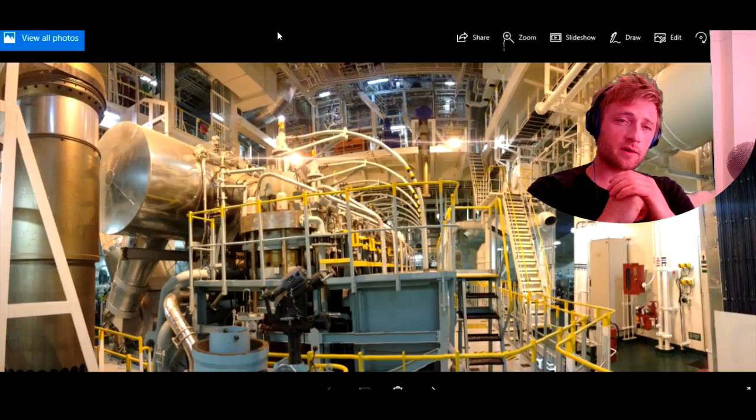As I have seen, this is a Greek company. And as I have seen here, this is something like Sulzer engine, okay, or Wärtsilä, something like that, RTA maybe. But I have never experienced with that. It's not so big deal though, everything is mostly the same. Some design is different, and tightening pressures, but everything is the same, two-stroke engine.

Very small difference, okay. If you take the manual and read everything, it's easy, okay guys. I have seen some difference in the exhaust valve here. There are only two hydraulic nuts and studs which tighten, smaller pipes here. Yeah, they have some difference.

Very clean engine room, very good, very new ship. Only 2 years old, it's like everything is new.

And here it's in the purifier room. We have seen here auto backwash filters, Boll & Kirch, I have seen that one. IMO pumps, same as my previous type. Everything is the same, only this pump is horizontal type, but it's same as the previous. It's a gear type. Westfalia purifiers.

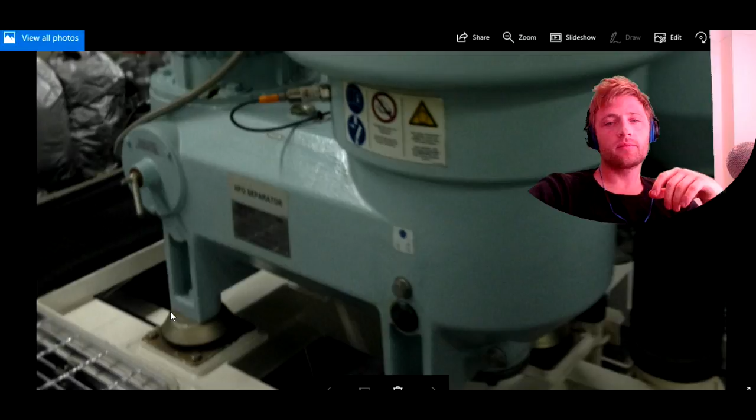I don't know if it's good, Radoslav. I have experienced twice with these purifiers. For 6 months I believe they work very good if the maintenance is good. Here we can see the brake of the purifier. We can see also the legs here, which are in rubber to avoid vibration.

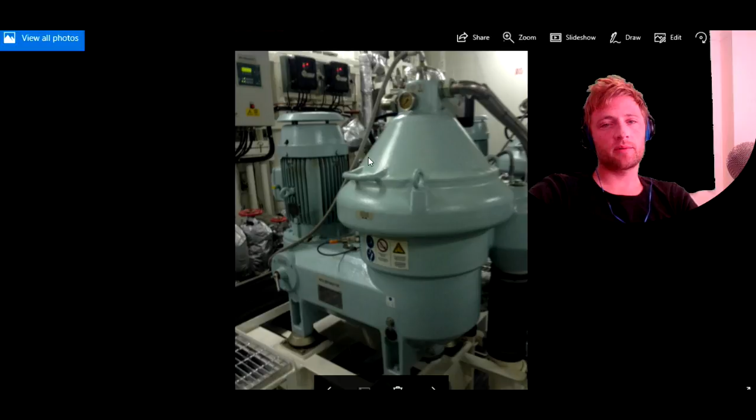Okay, purifier, it's a purifier. This is for the water supply pipe. Almost the same, nothing's changed since I have seen this purifier in 2006. Everything is the same, okay, this is a fuel feed pump, main engine, IMO type.

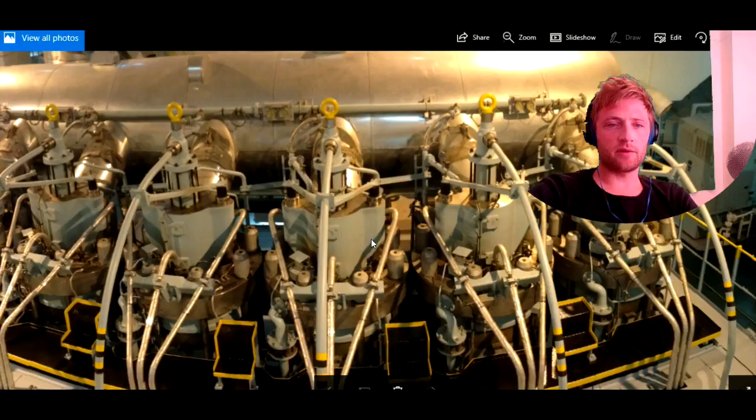And this is the engine from the top. Okay, we have 3 injectors on each cylinder cover. This is 2 nuts as I have seen, but okay, the studs are very big. Everything, the exhaust valve, it's opening with oil, same as B&W. I like the space here, it's very easy to work and you have plenty of space.

Space is very important to work in the engine room. It's better to have one stand here or one platform. I don't know, this is VLCC, seems it's VLCC, Radoslav, yes?

Almost the same, exactly the same. We had our generators here, because I see from the design. Okay, the ladder maybe it's changed a little bit. 2 turbochargers.

Nice, very clean. I don't know, maybe these rails, everything, the paint was made by the crew. And here it's the service and settling tank of the incinerator, okay.

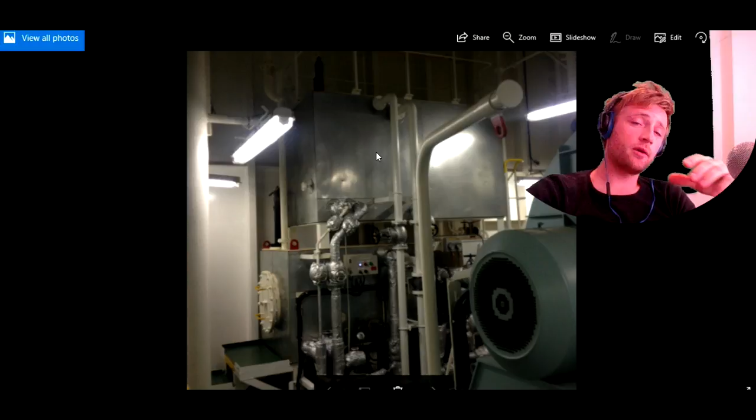At the evening time, okay, we start from the evening, the oiler and 3rd engineer fill this tank for the night. At night time this evaporation takes place, and whatever water is evaporated, okay, the oil remains here at the middle, or maybe up, it depends how much water is concentrated in the sludges. In the morning they drop the settling to service, and the temperature goes to about 80 degrees, because some incinerators have a lock, they will not start if the temperature doesn't reach 80 degrees, because if the temperature is lower, maybe you will damage the stator of the pump of the incinerator.

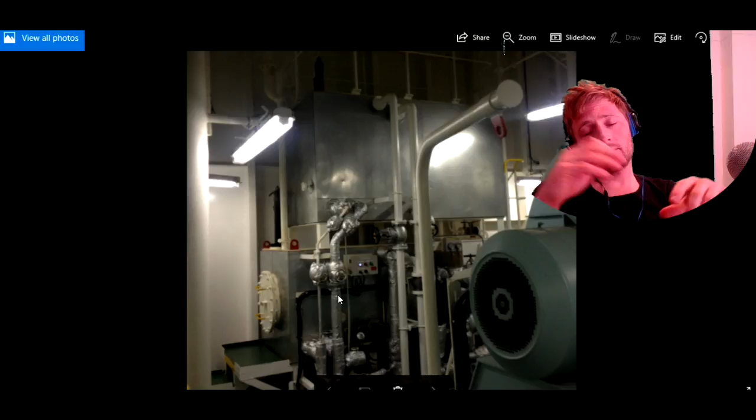Okay, and then they start, the incinerator works all day until it burns the service tank. It depends if the quality of sludge is okay, and directly they fill, same day they fill up the settling tank to stay all day and all night and to be ready for tomorrow. Okay, this is how it works.

And from here you can control the pump, the sludge pump, which sends here. This is the filling valve here, and here this is a sight glass for overflow, you can see if your service tank or settling tank overflows. From here is the heating inlet and outlet, this is the inlet of two tanks. There are some temperature controllers here, temperature sensors, pressure gauges of the circulating pump.

This is the pressure gauges of the circulating pump, located somewhere between the pipes. And here these are sounding pipes for the service tank, and a sounding pipe at the top for the settling tank. Inspection doors.

Okay, let's continue. This is the top, these are the service and settling tanks here. This is the blowers, okay, this is the boiler supply air draft fan, supplies the air for the boilers. This is IG fans 1 and 2, and this here it's the scrubber tower. It's exactly the same, maybe this is VLCC, a big ship.

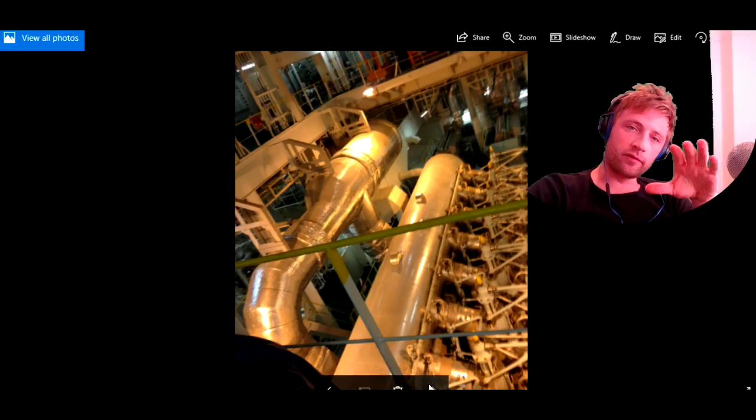Top view of the engine. Okay, this is compressors. I really don't like this compressor because it's not water cooled, it's air cooled. It's a small compressor, but I believe this one is water cooled also.

Maybe also this one, but very small amount of cooling, because on other ships, in a previous ship, we had very strong 4-stage compressors that filled the air very quickly, everything. This one, these are really small compressors. I have faced this type of compressor before.

Okay, this one is an updated version. I have one experience on a ship where small pipes were broken by the vibration.

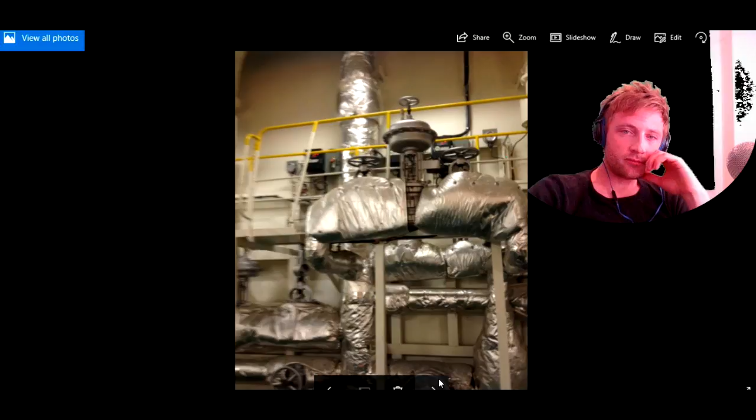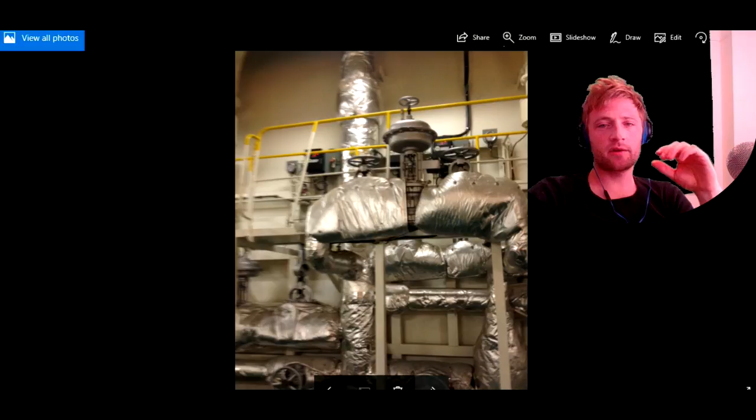Next, these are some steam dumping valves here, some controls. Maybe this is for the deck heating, most of them, okay, for 6 kilos, 10 kilos dumping, steam dumping system.

And here it's the hydrophore and drinking tank. From here the water supplies to the engine room. One of them is fresh water, one is drinking water, and the other supplies to the galley from the freshwater tanks. The pumps fill the level here.

Okay, and when we open somewhere the water, it supplies from here by the pressure through the line. The pressure is kept every time in the line so the water can travel. This is the suction point here, and the discharge is this one.

I have made videos for this one. I believe I have time lapse where we check this hydrophore, we open it inside. Check them please. We also test pressure gauges and pressure switches. Very simple system, nothing here.

And here it's the mineralizer, which gives minerals to the water. This also must be inspected, and I have made a separate video for that one.

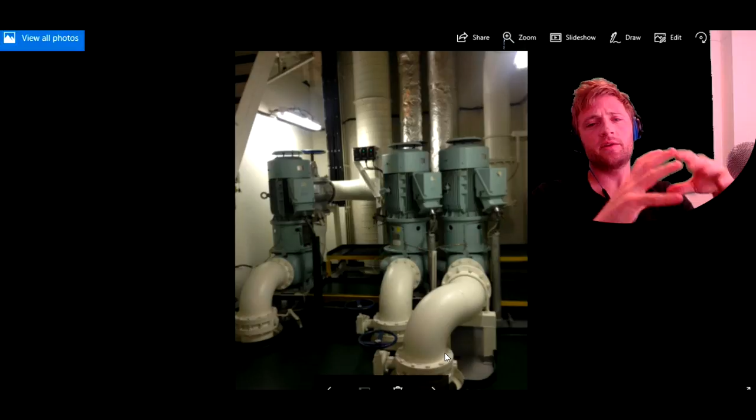Okay, this is some kind of pump. I believe these are low temperature cooling pumps, three of them. And next we have the evaporator.

In the last ship I had the same type of evaporator. Okay, this is Sasakura, same, exactly the same.

And here it's the atmospheric condenser, and at the back maybe it's the cascade tank. And here we have a 3-way valve, which adjusts the temperature in the high temperature system and low temperature jacket system.

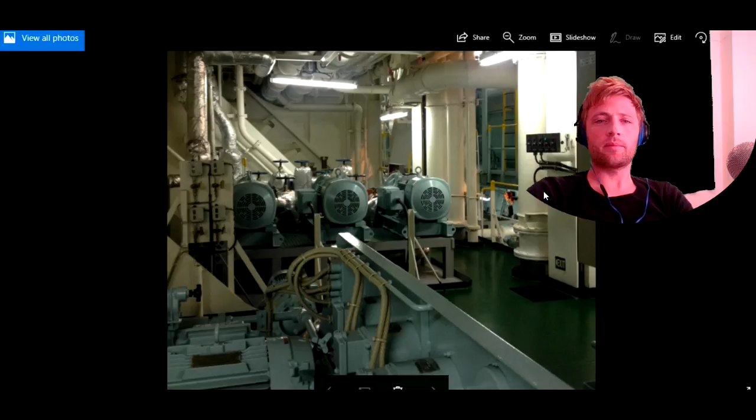It's connected to this set point box, Nakakita. And here I believe we are almost at the bottom somewhere. This is the feed pumps, 3 boiler feed pumps. You can work the system with one, each one, or you can also work with 2 pumps.

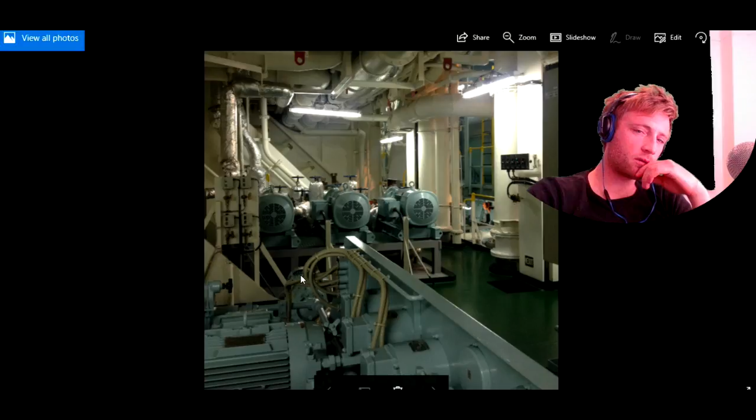And here also, first time I see this hydraulic unit, these pumps, located down in the engine room. Most of them are located in the upper deck or sunken deck, and they have a separate room. First time I see it located in the engine room.

This is the remote control valve system. The chief officer operates it from his cargo control room.

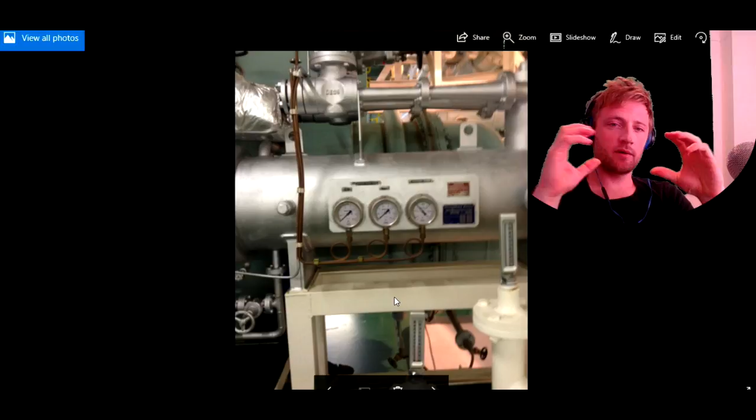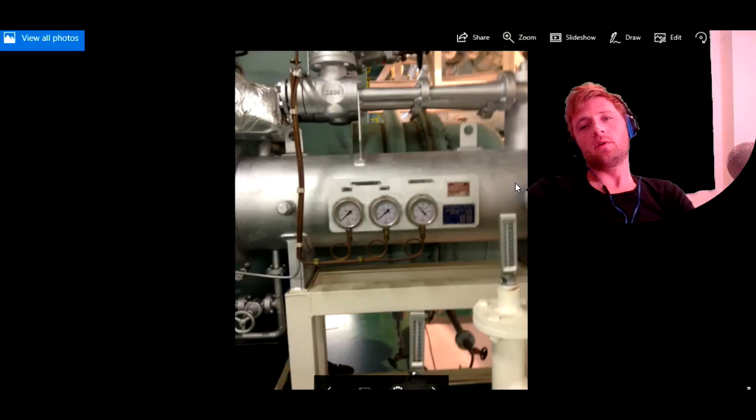And this is the ejector cooler. This is a cooler, and also at the top you can see the ejector, which produces the vacuum inside the condenser. The steam passes at the middle here, has high velocity, and produces a draft from here, dragging whatever air is inside and pulling it out, and this way the vacuum is obtained.

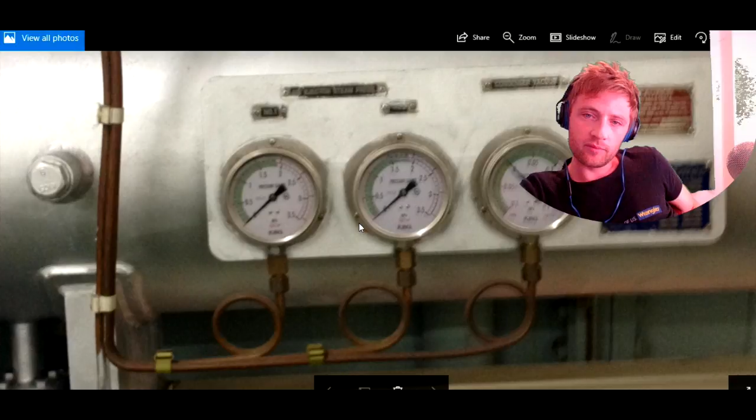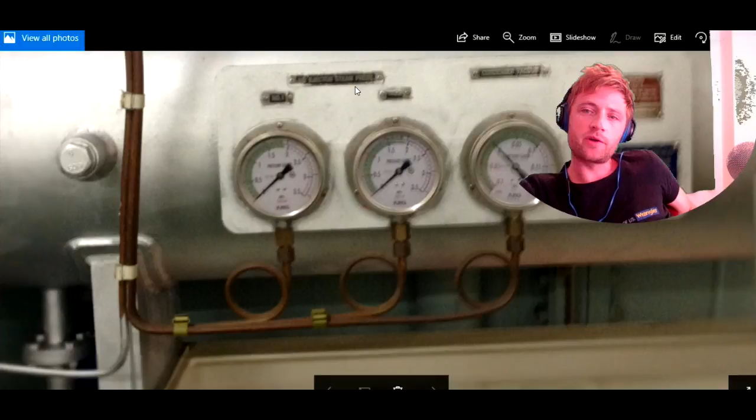Here you can see the vacuum. Where is the vacuum? Okay, here is the pressure, it's not working now, and the vacuum is here, condenser vacuum. This is the pressure of the injector, air injector steam pressure. Same type, everything. I see the ship is Korean built, exactly the same type.

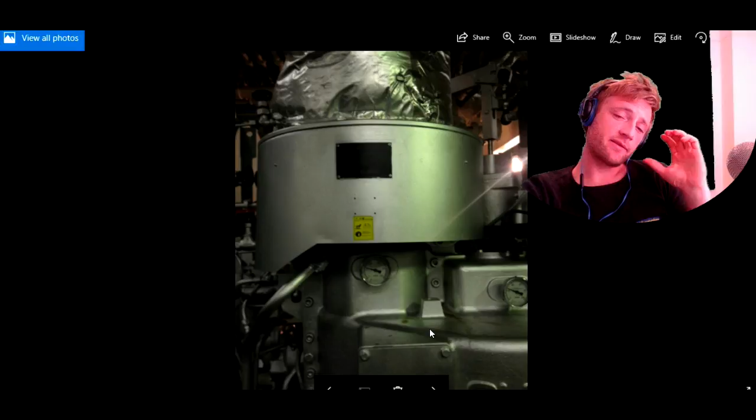And this is the turbine. Okay, this is Shinko. I recognize it. I'm very satisfied with Shinko. If you make proper maintenance, maybe you will never need to touch them. Only to replace some oils, some mechanical seals, as time passes, and some grease, some lubricating oil, and monitor them. It's a very nice system and durable.

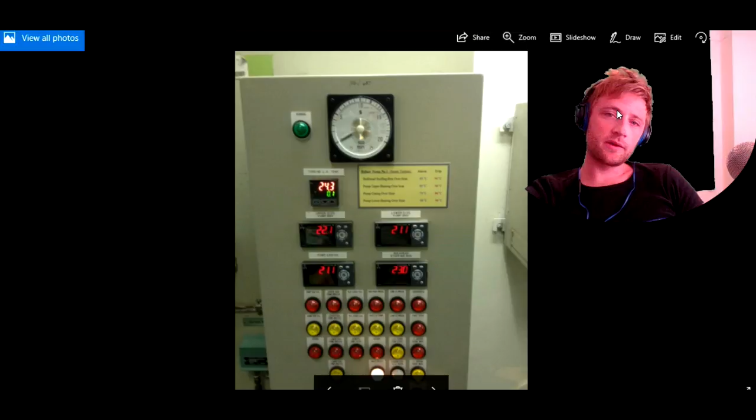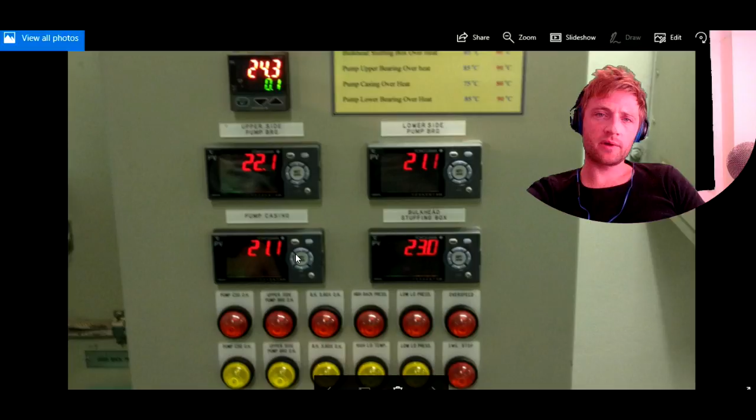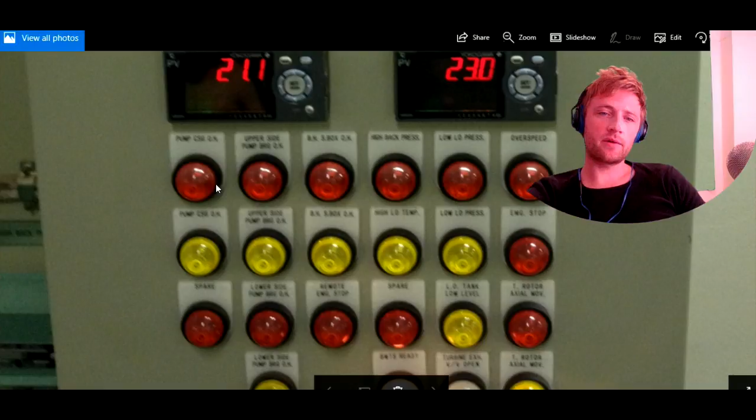And here this is the control panel of the Shinko pump, the turbine pump, where we can see the bearing temperatures: upper side, bulkhead, pump casing, upper bearing, low side, pump bearing. We can also see the trips, the alarms, and what temperature is coming, turbine L.O. temperature, and here some alarms, some indications, which also have an RPM meter.

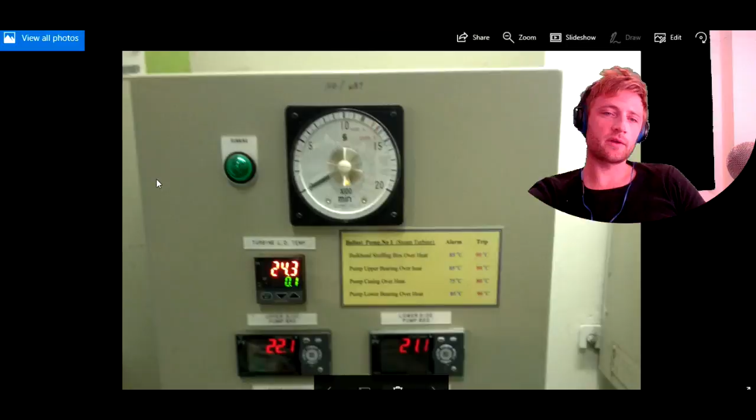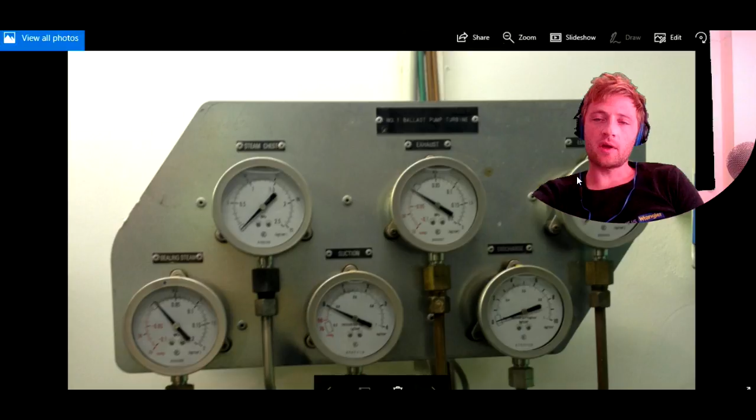And here, what is this? If it's running. Here are also some gauges. We see the steam chest, the sealing steam - this is another word, gland steam. Suction of the pump, discharge, exhaust, and lube oil. As you can see, the pump is not working here.

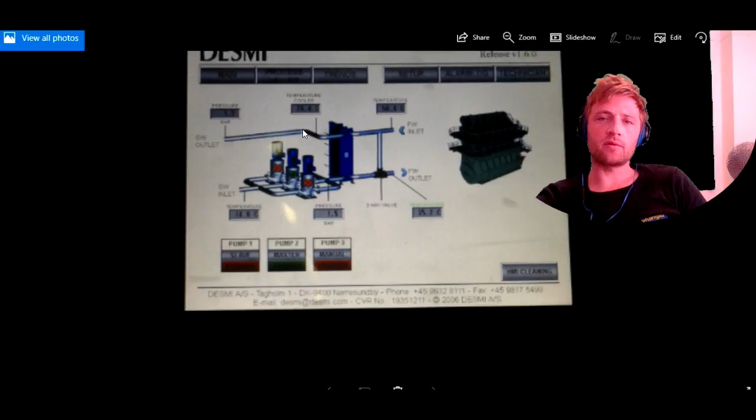Fire pumps, this is the bilge. Fire pumps, ejector pumps, main cooling seawater pumps, exactly the same. All the tanker ships are the same. And here is some control panel for the pumps and also for the cooling system, from where you can see exactly and better what is happening with the water.

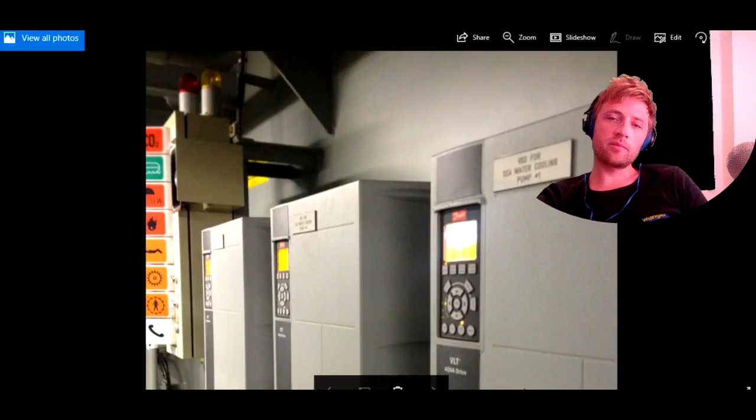Some new control panels, VSD for the seawater cooling pump. Every time something new comes to marine engineering, they fit some new kind of installations, but most of it's the same, they have the same working type.

Okay guys, that is it. There are no pictures remaining. We've seen it all, a little bit about how it is on another tanker. Most of the tankers are the same, it's copy paste, nothing changed, because through the years the systems have been worked and tested, and this is the best kind of installation, however you will determine it. Maybe it will be better in other companies, or will be less. Maybe in other companies you will sit at the computer and check everything from there, and you can also operate the valves. But in my experience on tankers, I have never seen that, to operate a bilge pump from the computer. No, I didn't see it.